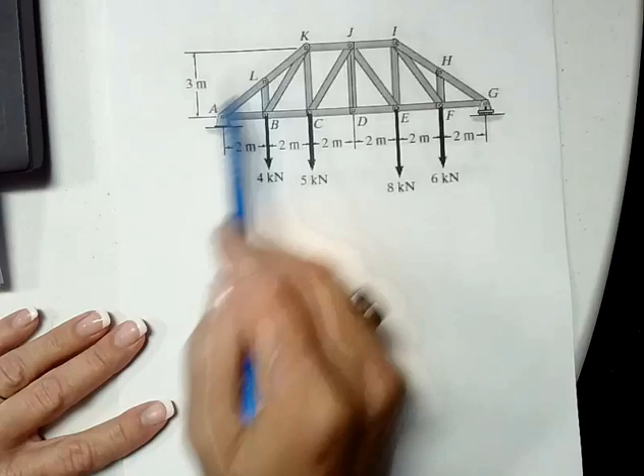Use this truss to find the axial forces in the members using the method of joints.

By definition of a truss, each of these joints is a smooth pin, which means that if the whole truss is in equilibrium, each joint must be in equilibrium. We're going to take advantage of that in order to solve for the axial forces in these members.

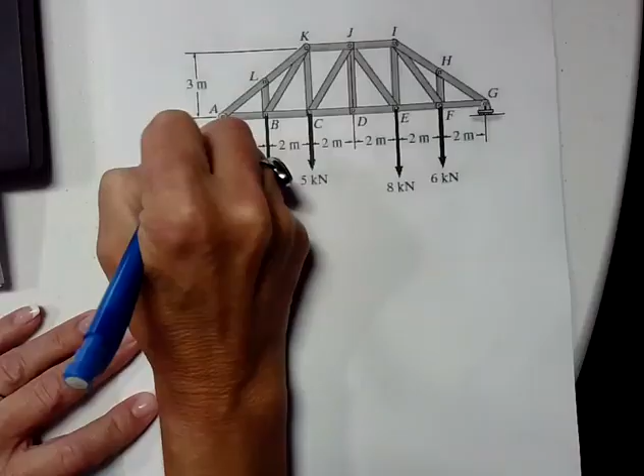So the first step is to solve for the reactions at A and G. A is a pin, so we're going to have a reaction in the Y direction and in the X direction. At G, this is a roller, so we're only going to have a reaction in the Y direction.

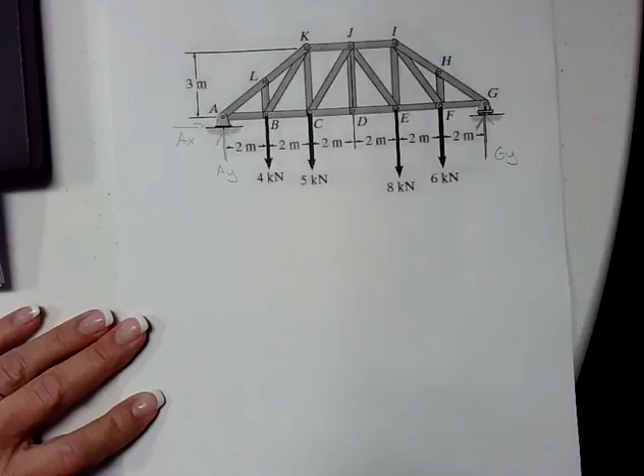Since AX is the only force in the X direction, I can use the sum of the forces in the X direction equal to 0 to determine that AX is 0.

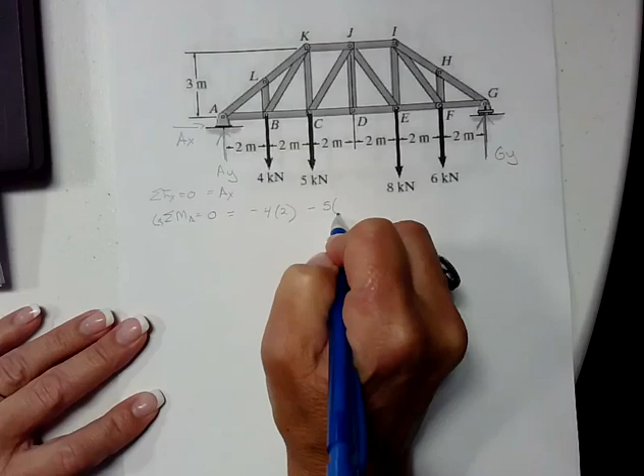There are two forces in the Y direction, so I'm going to use the sum of the moments about A, which is equal to 0, to solve for the reaction at GY. Taking moments about A, I have a 4 kilonewton force times 2 meters, a 5 kilonewton force times 4 meters, an 8 kilonewton force times 8 meters, a 6 kilonewton force times 10 meters, and then GY times 12 meters.

If you solve for GY, you get 12.67 kilonewtons pointing up. Then I can use the sum of the forces in the Y direction equal to 0 to solve for AY. That will be AY minus 4 minus 5 minus 8 minus 6 plus 12.67, which is GY. If you solve for that, AY is 10.33 kilonewtons in the positive direction.

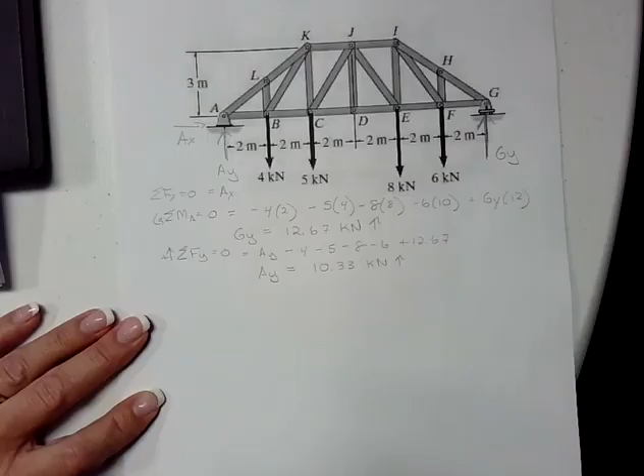Now, we can pick any one of these joints to solve for, but let's say we wanted to solve for the axial force in AL and AB. Then we would choose joint A to solve for the axial force in each of these members.

Again, if the entire truss is in equilibrium, then this joint A must be in equilibrium. So I can rewrite this joint A, just that little joint, and then all of the forces on that joint.

AX is 0, so I can ignore that. We have AY, which is 10.33. And then we have the axial forces AL and AB, and I don't know which direction these are, so I'm going to draw them both in tension. So I have AL and AB, and those are the three forces at joint A.

When you're using the method of joints, you want to find a joint and start with one that only has at most two unknowns. The reason is all of the forces are concurrent through the joint, so you only have two equations of equilibrium: the sum of the forces in the Y direction equal to 0, and the sum of the forces in the X direction equal to 0. There are no moment equations when you are just solving for that joint.

So I can start with the sum of the forces in the Y direction, and I have 10.33 up plus a portion of AL. I happen to know that this angle here, if we look up here, this is a height of 3, this is a distance of 4, so this is a 3, 4, 5 triangle.

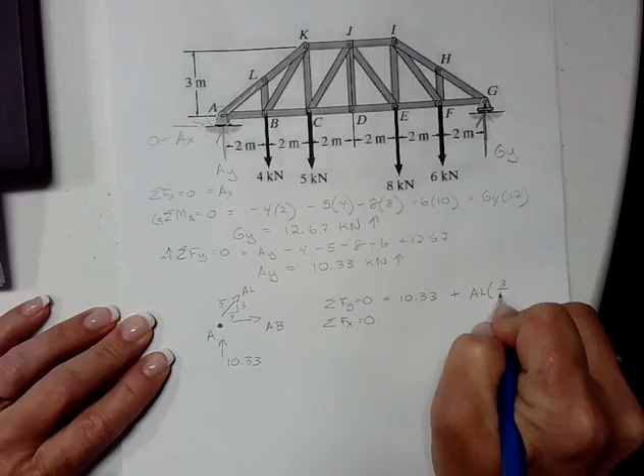So I can take 10.33 plus AL times 3/5 equal to 0. If I solve for that, I get AL is equal to negative 17.22.

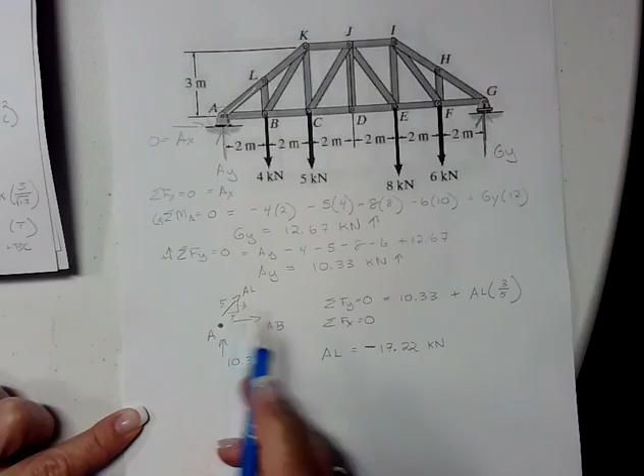And this will be in kilonewtons. We got a negative force here. Of course, we can never have a negative force. What that is telling me is that I drew this in tension, and it really should be in compression. So I'm going to cross that out and draw it in the opposite direction.

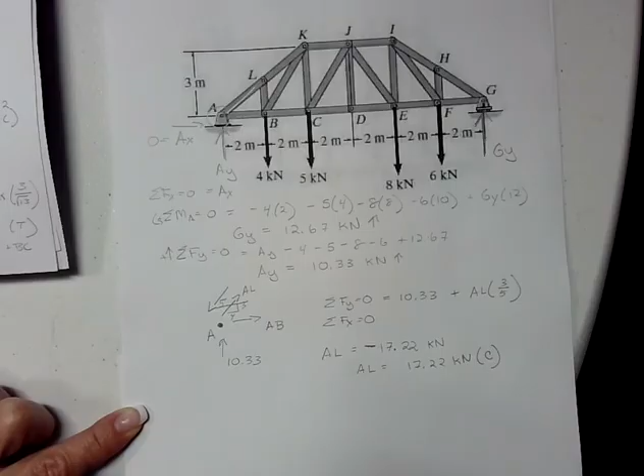And I will write this as AL is equal to 17.22 kilonewtons in compression. The reason that's important is because it's in compression here. If I move over to joint L, then it's also going to be in compression there. So this is going to be 17.22. So the negative and the positive sign don't really have any meaning. We need to use compression or tension.

But coming back here to joint A, now I can use the sum of the forces in the x direction to solve for AB. So that will be AB minus AL, which is 17.22 times 4/5. If you solve for that, AB turns out to be 13.77 kilonewtons. And since it is pulling away from the joint, we know that it is in tension. So now I have just solved for the axial force in both AL and AB.

I can then move on to joint L, for example. We know we have the 17.2 coming from AL. I usually draw all of the forces in tension until I know what direction they are. So this would be LK, and then I have LB. We could have done this to start with, but if you look at this, just by visual, without solving for anything, we know that LB is a zero force member because there are 3 forces concurrent at joint L, and 2 of them are collinear, so this one must be a zero force member.

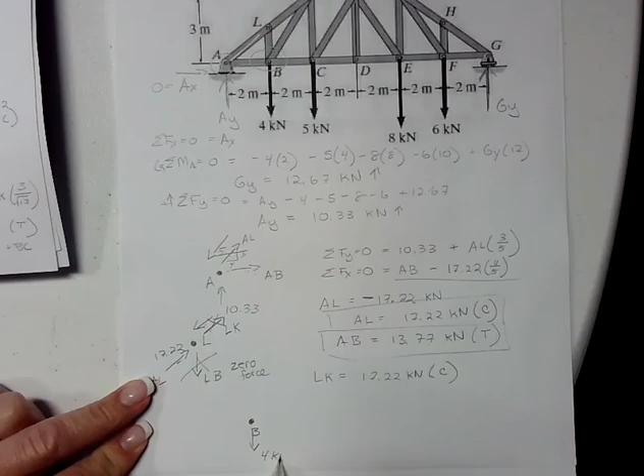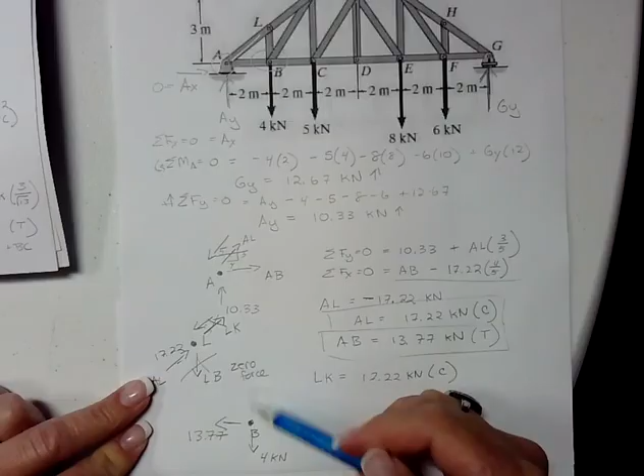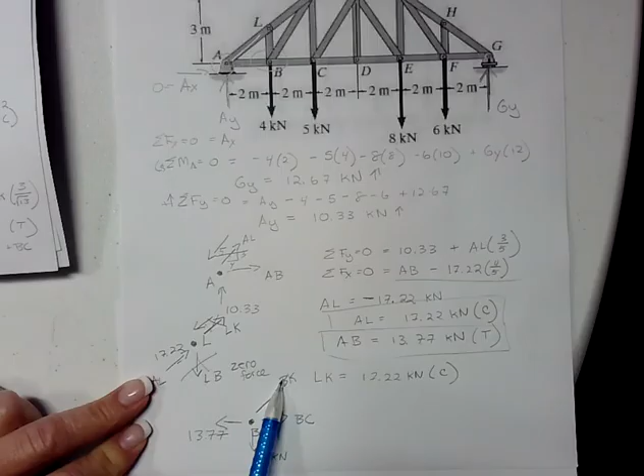Similarly, I could move on to joint B here. If I were to draw joint B, I would have the applied 4 kilonewtons. I would have AB, which I know is 13.77 kilonewtons in tension, so it's going to pull away. We know that LB is 0, so I don't need that one. And then we have BK and BC. So we have 2 unknowns and we have 2 equations to use.

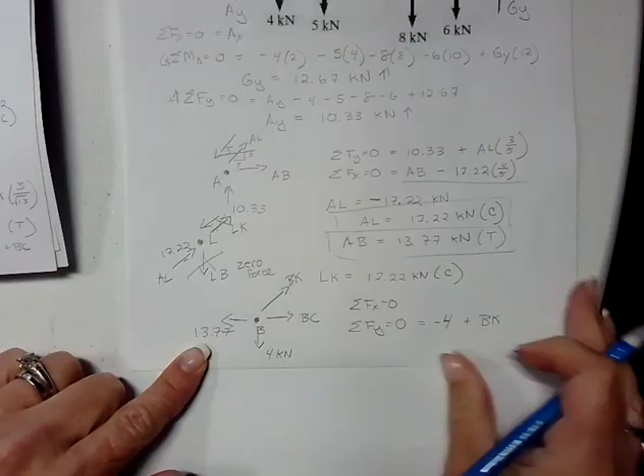So I will use the sum of the forces in the x direction is equal to 0, and the sum of the forces in the y direction is equal to 0 to solve for BK and BC. So this one would be negative 4 plus BK. And this angle now would be, let's see, we have 2, 3, and the square root of 13. So BK would be times 3 over the square root of 13. If you solve that out, BK is 4.81 kilonewtons, and it is in tension.

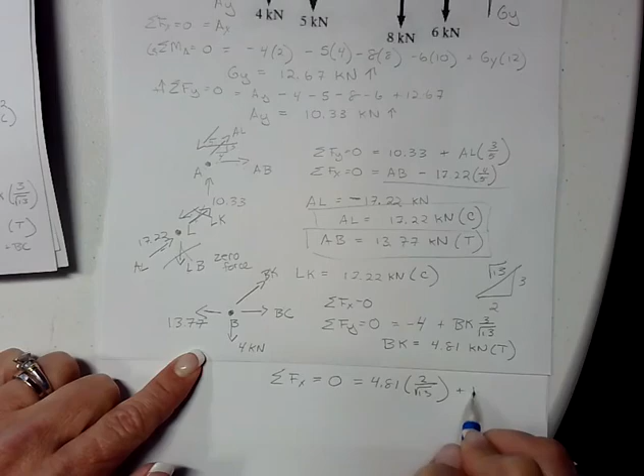Then I can solve the sum of the forces in the x direction is equal to 0, and I have 4.81 times 2 over the square root of 13 plus BC minus 13.77. And so my BC is 11.1 kilonewtons in tension.

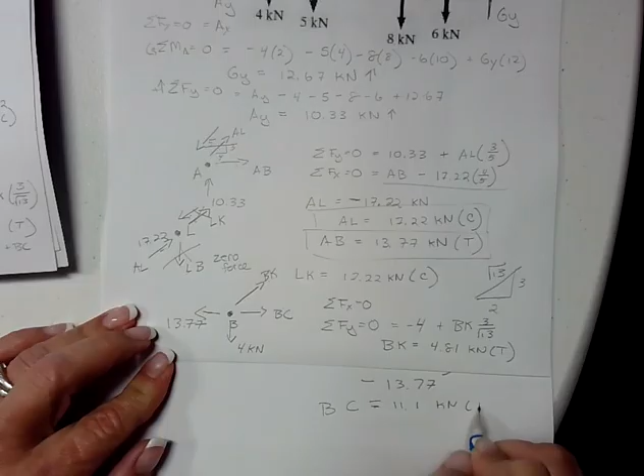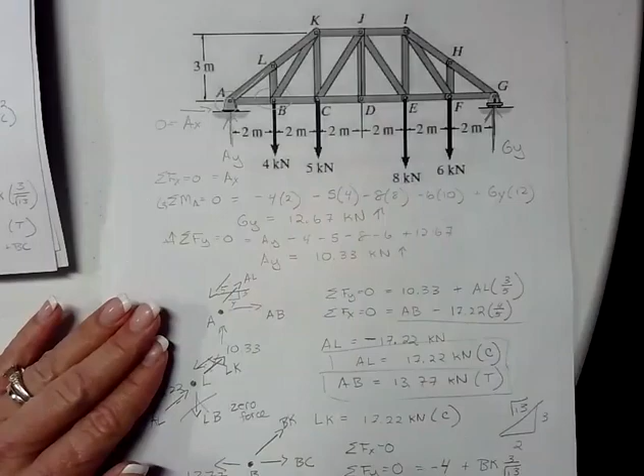So then once you have that, you could then move on to joint C, because now you have B, and you could continue to solve the forces in each of these members.